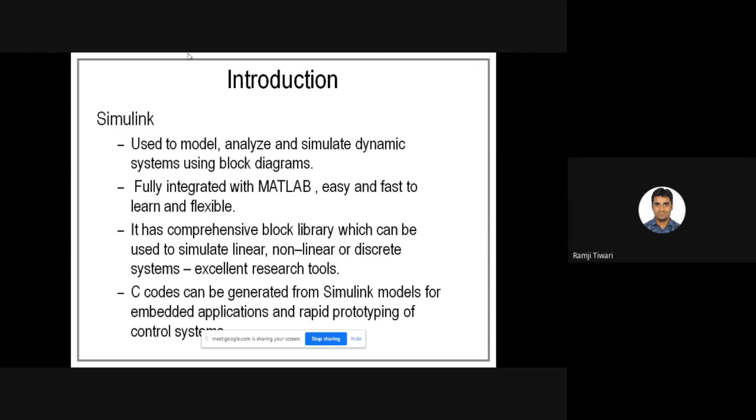You will be having all the toolboxes. You're going to drag that to your Simulink file, connect it, change your parameters, and after that you're going to run and get your results. It's quite simple. So how to start?

So basically, if you want to start your MATLAB, in Windows 7 and earlier versions, you'll be having Start, Programs, All Programs, and then you'll go for MATLAB. If you're using Windows 8 and above, you can see my screen will be having Start here. You click Start, and you'll be having a program here. You can actually drag it to M, and you'll find MATLAB.

If you click this one, you'll be getting something like this. The first page will be something like this. This will be the initial page of your MATLAB. When you open your MATLAB, the first page will be something like this.

We'll be having a command window, you'll be having a workspace. When you are first time on MATLAB, this current folder will be empty. You won't be having anything. It's just a MATLAB folder in your C drive.

Then next, what happens? So this is what I was saying. Once you open MATLAB, I've already opened that, so it's here. You open it, and you'll be having your current folder, your workspace, and your command window.

So the command window is nothing but, if you're going for basic calculations, you're going to assign some values. Let's say I'm going to do some multiplication. I'm going to assign some value for A, and some value for B, any variable, and I'm going to do a multiplication of A into B. So I'll be getting that result.

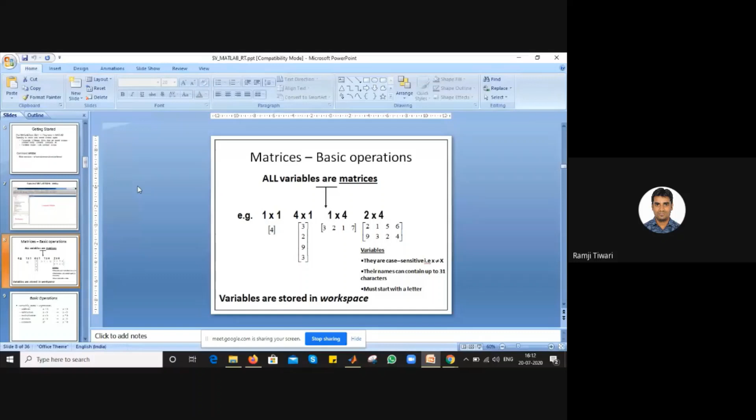So now next, I don't want to go again over the basics of your basic multiplications or divisions. I'm going to tell you much more advanced things, what we're going to do with matrices, the basic matrices, what we see in college in first year or in schools. You'll be having your matrices.

So if you want to give a column vector, you're going to use a code something like this. You'll be using a semicolon between your variables, something like this. I'm going to open the bracket, I'm going to use semicolon for generating a column vector, and if I enter that, you get your column matrix here. Now, what if I want to do a row matrix? I can just give, say D equal to, I can open, I can give space. Use space for that, and I have to enter.

So you get a row matrix. This is how you generate your matrix. So this is just one by one.

Now, what if I want to go for a 3 by 3 matrix? If I go with C, 2, 3, a semicolon - one row is completed. Now second row, 4, 5, 6. Again a third row, semicolon. You have to segregate your rows using semicolons. 7, 8, 9. This is how your 3 by 3 matrix has been generated.

So it's all very, very basic. I will be sharing the PPT with you in the organizer so you can have a clear look at that. In the PPT, I'll have all the basics on how to use matrices and everything - your column vector, your row vectors, and your 3 by 3 matrix.

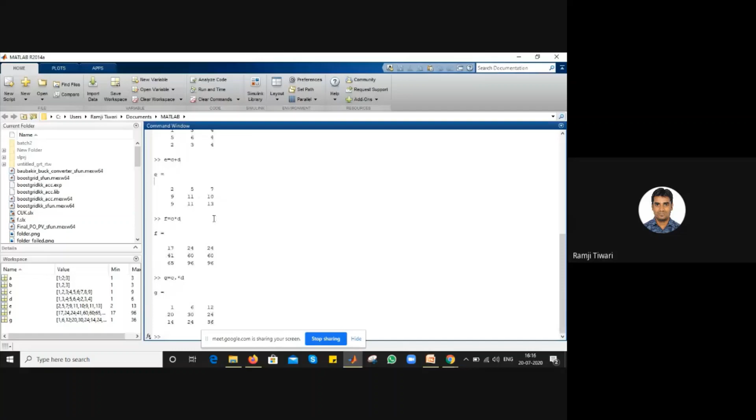So what's the difference here? You can see the answers. If you just go with C into D, you get 17, 24, 24 - it's row into column, your usual way. And when you go for element to element, what happens? You can see C and D here - your 1 into 1 is 1, 2 into 3 is 6, 3 into 4 is 12, something like that. 1, 6, 12. I'll go with the PPT, it will be more clear for you.

What if I want to find a square? Because again, finding a square is very difficult manually. So at that time, you have to use your caret - I'll just show you. Suppose I give some variable name t, which will find the square of C.

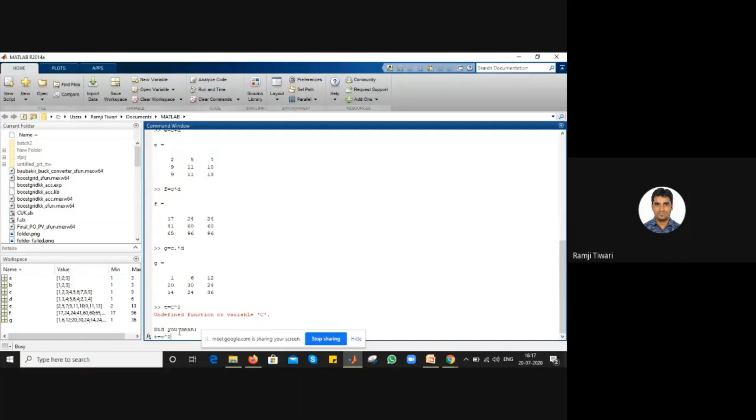One more thing I have to say here - it's very case sensitive actually. If you're using a small c and then you give a capital C, an issue may happen. So you have to always give the same variable, whether small or capital alphabets - you have to give the same variable. It's very case sensitive. So for using your square, you have to use this symbol.

So this is the basic operations we do in the command window. The command window is something like a calculator - your basic operations you're going to do here.

But next comes your M file - this is where the actual work starts. Your actual MATLAB starts from the M file. In the command prompt, you're going to use simple problems, simple operations and everything like that. But when you come to the M file, you're going to use complex problems, or problems which you're going to use again and again. You have written a code and you want to use this code again and again - at that time, you have to go for your M files.

Again, M files are classified into two types - the first one is your script, the second one is your function. Now, something about your script - script is something same like your C programming. You're going to program something, you can get your results. That's it.

Your function, the function files, is actually embedded in your Simulink. You will be having a code that you're going to embed in your Simulink, where your input variables change according to your Simulink variables. Once you embed that in your Simulink block, suppose you have problems where your voltage keeps changing, and based on that change you want a specified output. At that time, you're going to use your function block. So the function block is generally embedded within your Simulink folder.

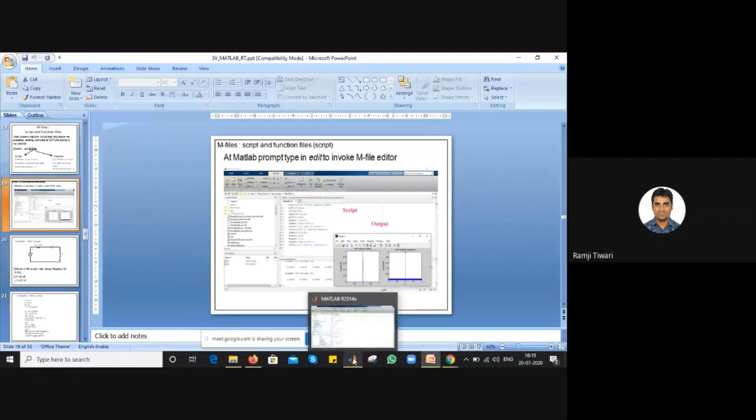So, how to open an M file? First, I'll tell you about it. You just see there'll be a new script option. If you click new script, an editor box will open here, an editor page. This is where you're going to type all your codes, like you would for C or C++. The same thing you're going to type here.

Already I have a small code, an example, that I'll show you. I have a code for a simple RLC circuit to determine the current. I'm going to just copy paste the same thing.

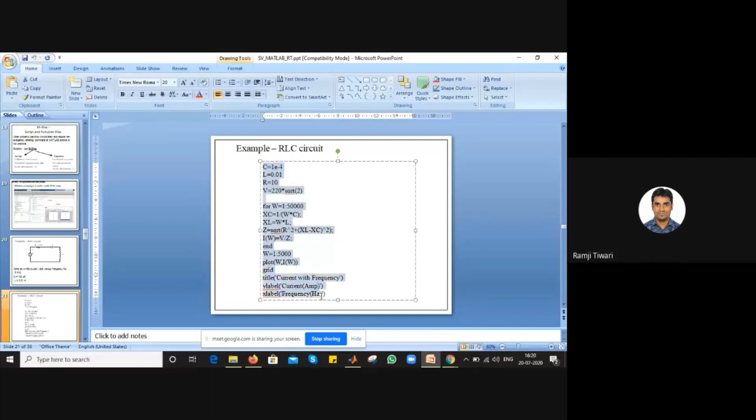So I'll just copy paste the same thing. You can see in your code what happens: you're going to predefine your capacitance value, inductance value, resistance value, the voltage - everything you predefine. And you're going to use W, which is nothing but your angular frequency.

You're giving something like 1 colon 50,000. You're going to give your formulas. What is the XC formula? It's 1 by omega C. What is the XL formula? It's omega L. So you give the same formula here, and you find an impedance value. With that impedance value, you find your current. So this is what you're going to execute in the program to find the current of your RLC circuit.

And once you have typed your code, you're going to save it. To save, again, you can use Control S or File Save As. I've used Control S now. I'll just show you how to save here.

We have something called save here. You can see at the top: new, open, save. So this save, you have to click it. You can save wherever you want. I want somewhere on the desktop, so I'm going to save there. I'm going to save it as sample test.

Once I save that, you can see the sample test name will be changed here in the editor box. I'm going to run this one. While running, it will ask me to change the folder because I am not saving in the MATLAB folder. I want to add this folder to the path, so I have to go for add to path.

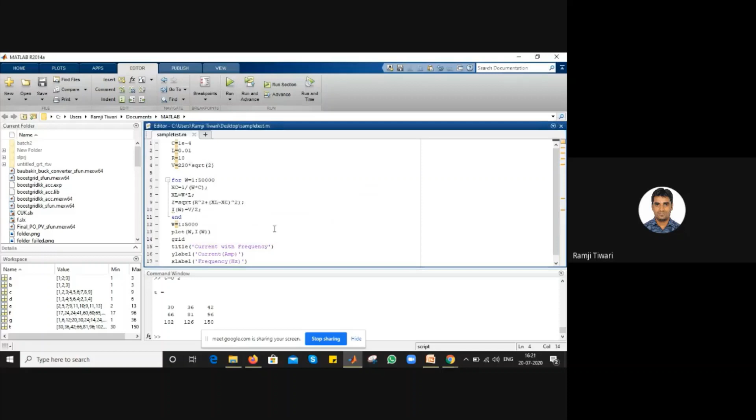If I run, my figure window will open because I've used something called plot here. This plot command is used to plot my figure. You just see plot W with IW. W is nothing but your angular frequency. I'm going to plot my current with respect to the angular frequency.

If I don't give W, what happens? It auto generates a time ratio, a time division - it auto generates, and you won't have a particular value. You'll have very small or irregular values, and an irregular figure. So always, whenever you're plotting, generally plot with respect to time or frequency, something like that.

So this is what's here. I've used a plot, and I'm just getting my figure like this. You can see already I've given my title - what's my title? Current with frequency. I'm getting a current with frequency here. My Y label is current, and my X label is frequency. So everything I'm just giving here automatically generates the output.

In detail about your coding, the basics of your coding will be taught in tomorrow's class, in tomorrow's workshop.

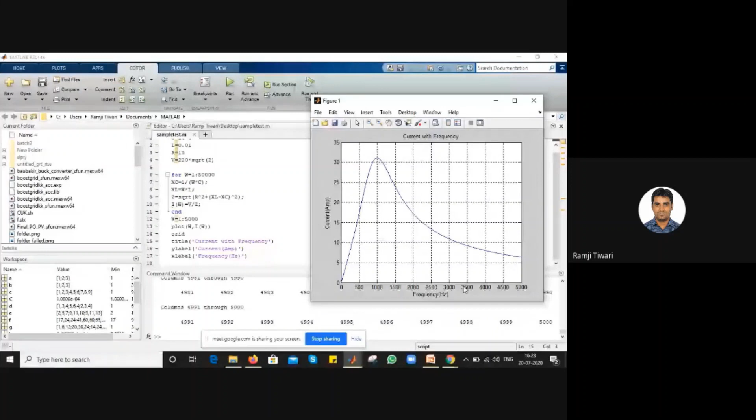So I won't be much focusing on the basics of coding right now. You just need to know the basic things. First, you're going to assign a value - simply give a variable name, say my name is Ramji, Ramji equal to some value you're giving, okay.

Second, you're going to perform your task. For performing the task, you're going to use certain formulas. So here I'm going to find your XC and XL values. I know the formula - my XC is nothing but 1 by omega C, and my XL is equal to omega L. So I'm going to specify that. I know my impedance value is the square root of R square plus XL minus XC the whole square.

So I specified that. Now I'm going to say my current is nothing but V by impedance - V by R, V by Z - and then I'm going to plot that particular file. But if I want to see what my impedance value is, I can just simply click here, the same thing you're giving there, IW.

And you see what are the columns and vectors, everything will be here. And each column, everything will be specified here. And if you want to see the data, if you want to take this data, you can get it from your workspace. Here you can get all the data - your XC values, your XL values, your Z values, everything you can get from your workspace. If you want to get it in table form or something like that, I'll just show an example.

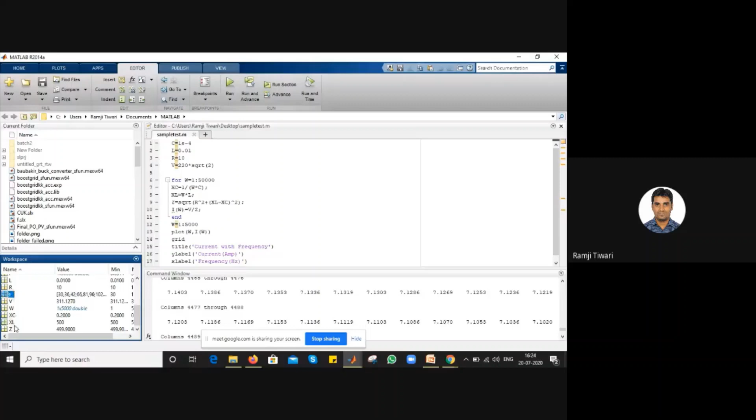Suppose I want for T. I double click this one. So I get my T value. I can save this in Excel or Word, wherever I want. I can save it, I can use it for my future references. So that's very easy, something here.

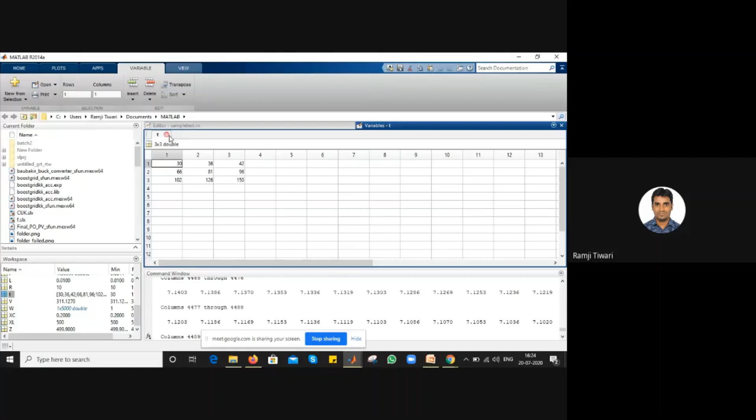And if you do the same thing in the command window, what happens? Suppose I'm just doing the same thing in the command window - this I can save, I can use whenever I want. But if I do this in the command window and press enter, it executes and I get an output. But if I just do CLC, what happens? It's completely gone, my code has been gone. Again, if I want to do the same code, I have to type everything again.

So always when you're doing a complex problem, not a single line program, kindly do it in your M file. How to open the M file? You open home, you have scripts. I've said to you again, I'm just reminding you - go to home, go to new script. If you click your new script, your tab will be open here. In this tab you can just type your codes. So this is how your M file works.

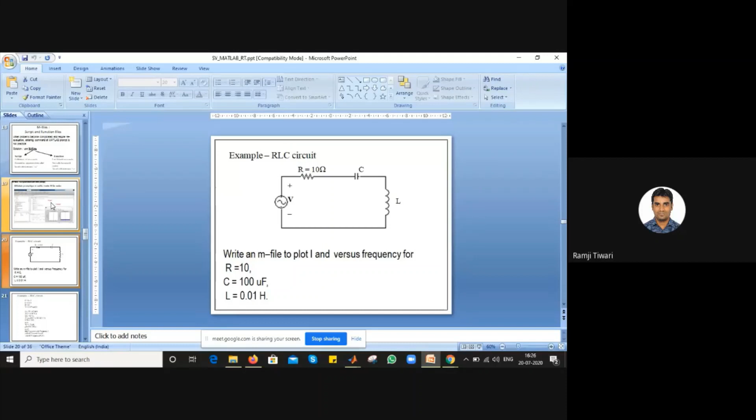So this, I've given an example of a basic RLC circuit. I want to find a plot of my current versus my frequency. So this is the code I've written for that. I've already defined my R, C, and L values. So RC value I'm going to define here. V is some voltage for your RMS circuit, which is nothing but 220 root 2. So that's what I've used here. And then I'm going to give the formulas for that, and I'm going to generate my results. So this is the output which I'm getting for your RLC circuit.

Now your function block - next comes the function block. What I said about a function block - it is something which is embedded in your Simulink file, which can be used for different input and different output variables. So here you want to specify that. Like for example, here your RLC value you have specified, but in case you're going to use it for some other circuit and you don't have your specific RLC value, you're going to use it for different systems, different times.

So again, you should not go to the code and change it there regularly. You can just directly implement the same function block in your Simulink file where you're getting your RLC values, and you can embed the same thing there. So you're going to give your input, you'll be having your commands here in the function block, and then you'll be giving your output. So when you start here, I'm not starting with anything - I'm just declaring my variables.

But what if I start from here in my function blocks? So my function block should start with the word called function. My output, which is equal to the function name and the inputs I'm going to give. In your earlier case, what was my output here? My output was your I value, and my input was RLC and 220 voltage. If you want, you can use a simple voltage block, but okay, we'll see - RLC and V, these are my inputs. So my function will be like: function IW, which is equal to your function name, any name which you want to give.

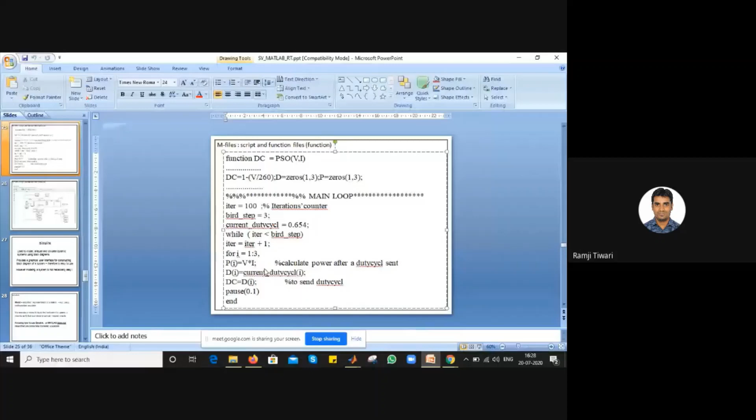Now I have designed a function for one certain task. My output for the task is something called DC, and my input for that is V and I. My function name is PSO. So this I have performed for one small task, and I've written all my code here. What is my DC? What is the formula for DC? How many iterations I'm going to use? What is my P? How to iterate P? How to iterate my V? Everything I've given here, you can see how to embed this one.

I have a Simulink file. My V and I are completely variables, so I'm giving that particular V and I to my MATLAB function block. My MATLAB function block is this one. My function name is PSO, my output name is DC. This is where your MATLAB function thing will be useful.

About your basics of circuits, that will be explained on your last day by one more guest who is going to teach you about power electronics. We'll be teaching much about when you use a closed loop, because generally this function block is used for your closed loop control in a real-time system. When you want to do basic PV, when you want to generate a duty cycle, or when you want to change the transfer function in control systems in real time while your simulation is running, at that time you're going to use the function blocks.

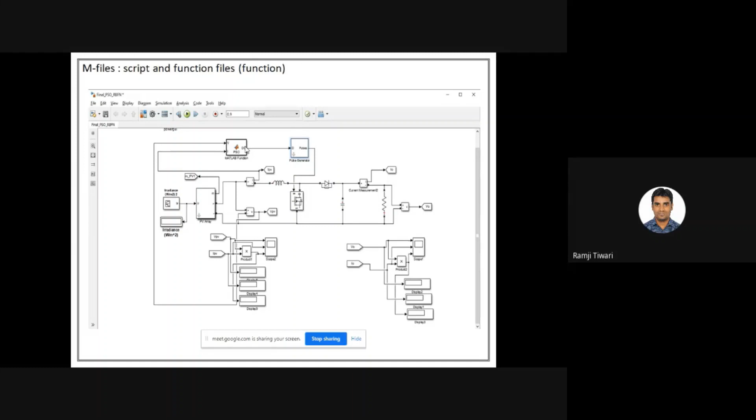Now, something about your third step is your Simulink. I've taught you what is an M file, I taught you what is a function block. Now, what is your Simulink? As I said earlier, Simulink is something to simulate or analyze a circuit diagram. You had a circuit diagram, you did that circuit diagram in the RLC time using coding. But what if we can do it some other way? So I can use Simulink for that.

This is generally used for analyzing your converters, your electrical circuits. For that, like your mesh nodal, your KVL, KCL values, your theorems - Thevenin's, Norton's, superposition theorem - to verify that particular thing, you're going to use your Simulink block. So it's very easy.

You can even use mathematical equations here. Like we have used that for XL and XC, we have used it in terms of code. Here you can use it again in simulation. You can give a mathematical equation in that particular simulation file, and you can run the same thing.

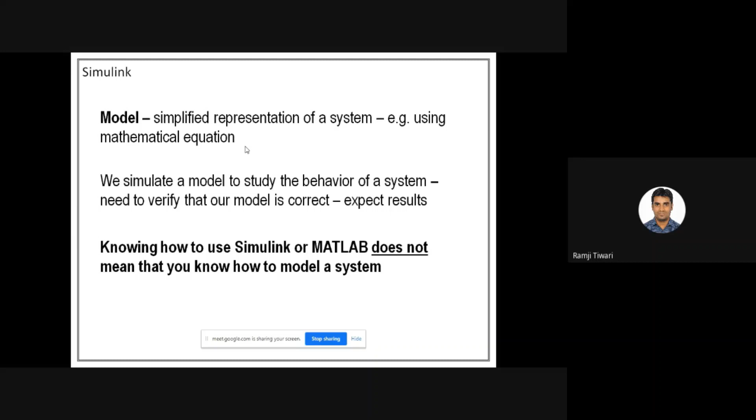The foremost thing which you want to know about Simulink is your simulation library. That's an important thing which you have to know in all of this, because in the simulation library you're going to use all toolboxes. So you're going to use the simulation library for that.

Now I'll just explain how to open a Simulink file. Like earlier, for using your M file, you're going to use home, new, script. To open your Simulink, you have to go for open, new. In this new, you'll be having something called Simulink model. If you just click this one, a page will open. I'll just show you what that is.

So you can perform some circuits like this.

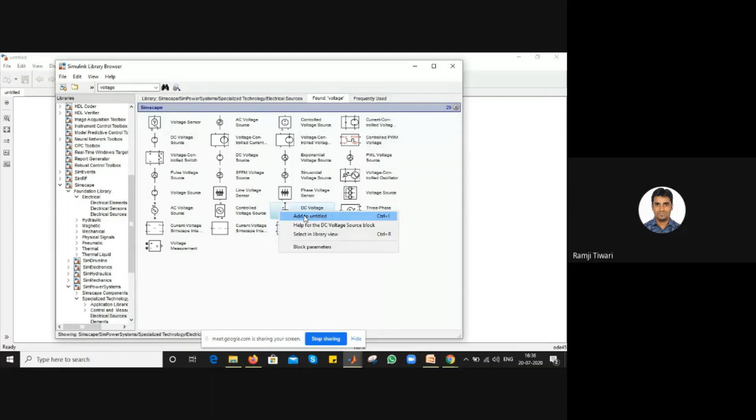As I said, the initial time will take some time because you have to refresh all the thumbnails, and there are a number of toolboxes. So these are whatever names of voltage sources you'll get here. You have two types, but generally we'll be using SimPowerSystems. You can just use a normal DC voltage source here. I'm going to design a DC circuit, so I'll be using a DC voltage source. I can just right click and add to Untitled. Untitled is just my simulation file name.

You can see when I've added it here, I got my DC voltage source here. Okay, now next, what I want is resistance. I want some resistance or something like that.

So for that, the term I'm going to use here is RLC. RLC is nothing but your resistance, inductor, and capacitance in the same block. You can use it as resistance, inductance, or capacitance. That is called a series RLC branch. When we use this branch, you also have something called load. You can use that load, but generally load is only applicable when you're using high systems and only for load purpose. But here, not only for load purpose, you're going to use it for multi-purpose, so you're going to use a branch for that. So I have my RLC branch.

If I double click this one, I can use it as RLC or combinations of resistance, inductance, capacitance. Like this I can use it. So initially I want resistance, I can use resistance. I can just give values, suppose I want to use 10 ohms, so I'm going to give it 10 ohms.

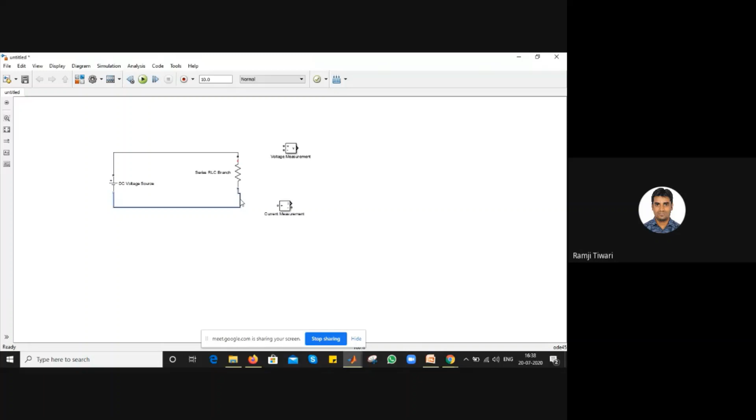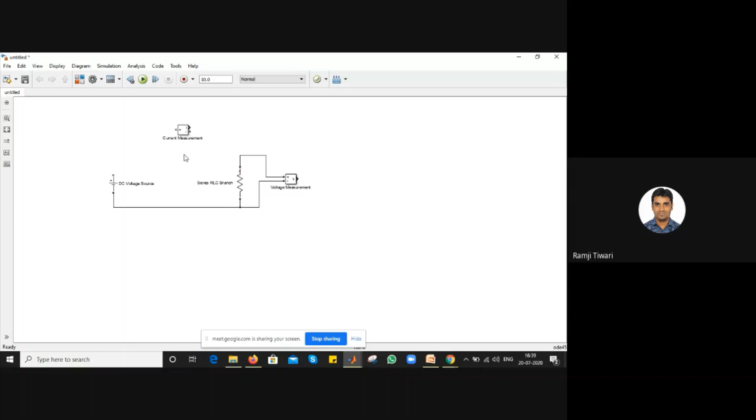So generally you're going to connect your voltage measurement across your load, and your current measurement should be in series - you connect your ammeter in series. So I'm going to connect it in series. Now I got my voltage measurement and current measurement.

Now how to see my output? There are two ways you can see your output. One, if you want it in terms of numbers. The other, if you want it in a graphical way, something like a graph. So for seeing that, we have something called a display. We use a display block.

When you go for the higher level, when you're doing some hi-fi project, something like that, then you go for your DSP blocks, your discrete blocks, and everything like that.

Then I'm going to use display here, config here. This is to check my output in terms of values. Okay, the same thing, I can just simply right-click, control, and drag, so that I can get it.

I don't want to go back to library and again add to Untitled. So you can just simply hit control, right-click, and simply you can drag. If you get, you can get a duplicate block.

Suppose if I want to see my output in a graphical way, I can go with something called scope.

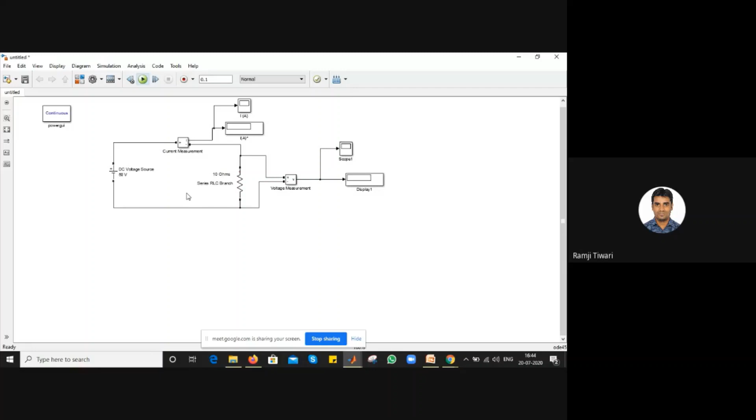The simulation started running. You can see here, first initially it compiles, it just finds out for some errors in that. So after compiling, it gives you the results.

So my compiling is almost done, and I got my output.

So I'm getting 50 volt because I'm getting 50 volt as this thing, and I'm getting my current as 5. In a DC circuit, your I is something about V by R, so it's like 50 by 10, you're getting as 5. So this is how your basic simulation is done.

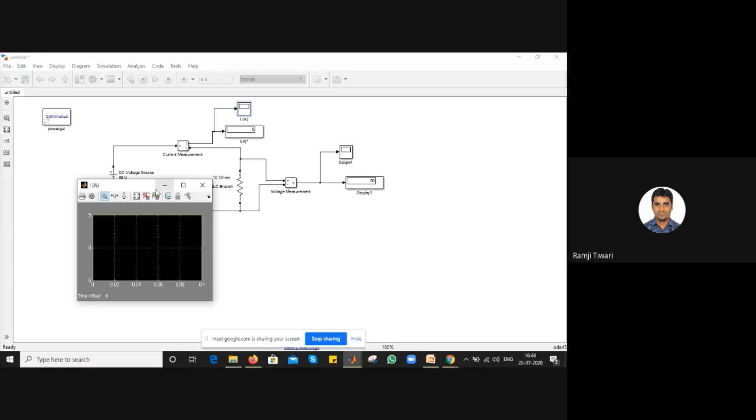Okay, what if I'm going to change it? And I'll just show you the scope thing. Same thing, what you have gotten in value-wise, you're going to get it here in your graphical way - graph, we have an X label, Y label, and your output 5 amp.

Okay, and like generally when you click, you have to use auto scale here to get the exact thing, because if you see before, it was like from 0 to 5 - I was not able to see my 5 because it was in line with your axis.

That's why I've done auto scale. The auto scale itself gives the perfect values. So it's very easy for us to see. I can see I don't have any settling time because I'm just getting my direct output. So I've used very less time, from 0 to 0.1 seconds.

What if I use 100 seconds? What happens when I use 100 seconds? It doesn't matter much, my simulation time will increase, that's it. I'll be getting the same output.

See, I'm not able to view my output. I have to do auto scale here so that I can get 50 volts, from 0 to 100, to show my output. Only my time axis will change, from 0 to 100 instead of 0 to 0.1. That's it. When you're using other very complex systems where you have more settling time, at that time you

have to take care of your simulation time. When you're using a basic normal circuit, it's advisable to keep it at 0.5 or 1 second. That's more than sufficient, because otherwise your simulation time will increase. So this is about a basic circuit.

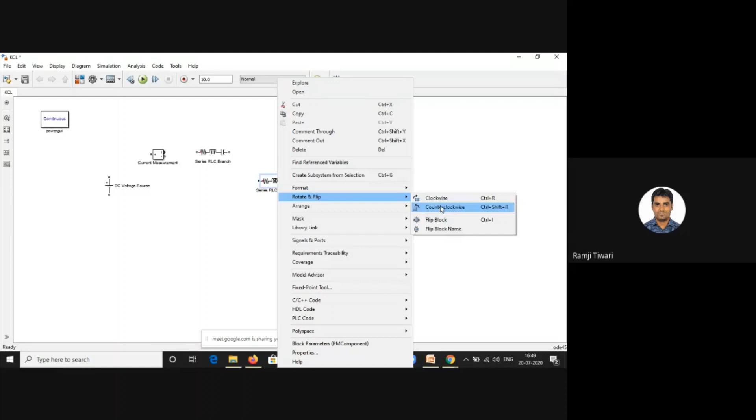Now we'll just perform a small KCL - so I have one input source here. Power here, again right click, control, simply drag. So you can see here it is in horizontal way. If you want it in vertical way, you can simply rotate this one. For rotating, either you can use the right click rotate option, or the simple thing is Control R. Or you can simply go to control and you can see you have a rotate option here, for anti-clockwise or clockwise. Either you can use this one, or simply put Control R. I'm using Control R right now. I've done this one.

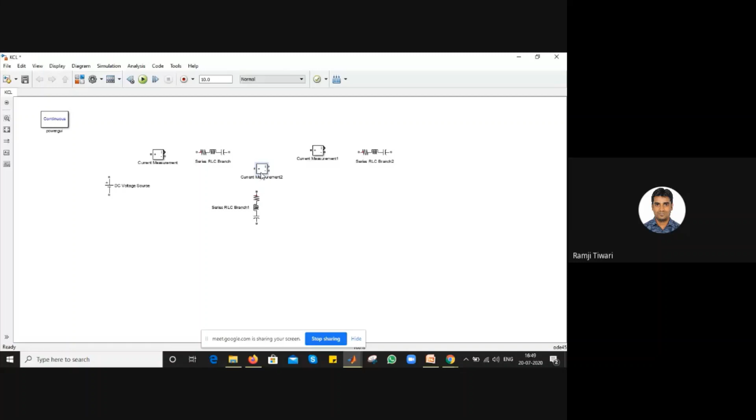So I need one more resistance, I will just keep it here. I'm going to keep the current block here, my current across each. So I can simply click and drag, the connection is there - it's very easy, connection is very easy. Simply click here, you get this positive symbol, click, right click that, drag it to your component and just leave. Okay, so you can just connect the entire block like this.

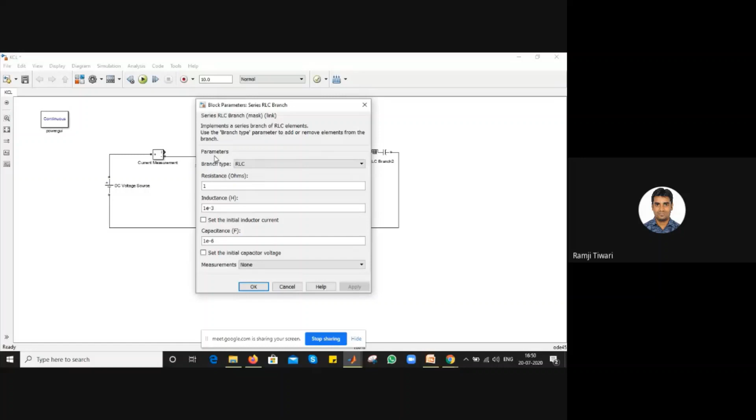Change it to resistance, I'll do some resistance like 10 ohms. Some 20 ohms. And this one, some 15 ohms. It is 100 volt itself, it will be 100 volt itself. I can just change it to 60 volt, whenever you can change.

To view my outputs, I need two blocks, either it's scope or display. Since it's just a value, I'm not going to use any graph way, I can just simply use my display block here. I'm going to add it here.

Okay, now I'm going to run this one. So you can see, the thing which I've done here is I've just interchanged my current measurement block here. You have to rotate this anti-clockwise, but I've done it clockwise, which means my current is flowing in the opposite direction, so it's showing negative. If we add both, let's assume this has to be positive. I'll just change this block.

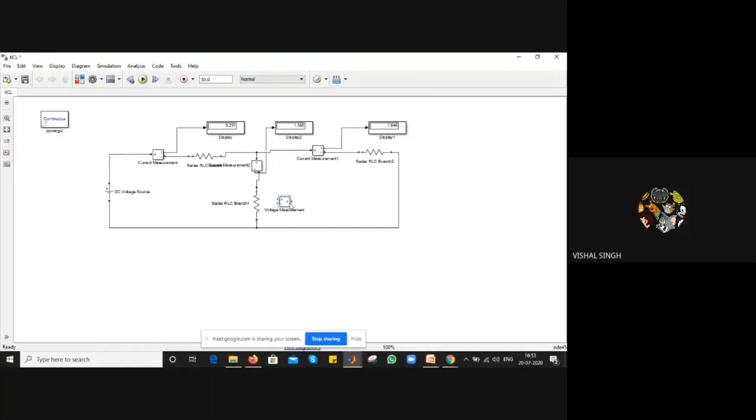So I want 3 voltage measurement blocks, but use the same thing. You can use the same circuit diagram, or if you want some other circuit diagram to perform, you can use that. You just have to connect your voltage measurement across your components.

Okay, just use the display for that.

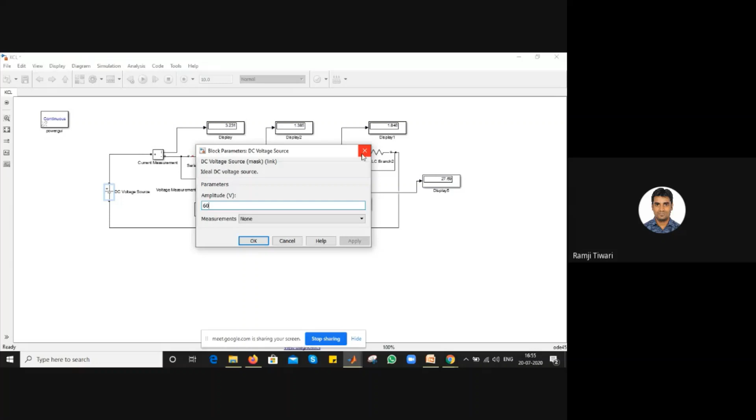If you see, my input is 60, and if you add the 2 voltages, this one and this one, you'll be having 60, because this is being divided by your resistance and resistance. Either you can remove this one, or I can just keep it.

This is usually used when you apply the voltage divider rule and similar concepts. During that time you can use this kind of circuit. If you want to see Kirchhoff's voltage law, algebraic sum of voltage around any loop is 0. For that, let's use any node, and during that time, what happens? I have 32.31 and 27.69. If you add both, you'll be getting your 60 voltage output.

Now, if you see, the system is completely congested, it's overlapped here and everything like that. What if I don't want to use these measurement blocks? I just want everything in a single graph or single value, without this much clumsiness. For that, you can use something called multimeters. I'll show you about that.

I'll go for a new model. Again, I'll use the same components we were using. I don't want to use any measurement blocks, but still I want to see my output. For that, use a DC voltage source. I'll use my series RLC branch. That's it, and your powergui.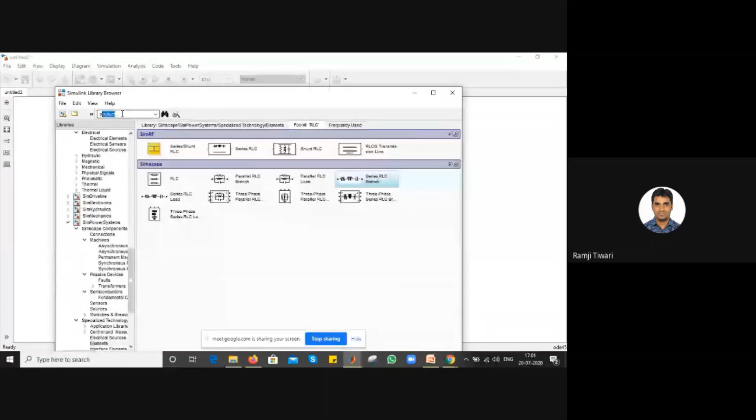Third thing we have to do, as I said, your power GUI. Your power GUI is nothing but heart for your simulation file. So I'll just put power GUI, enter. We're having a power GUI - only one block will be there. Simply click add to Untitled. We have this thing, it's done.

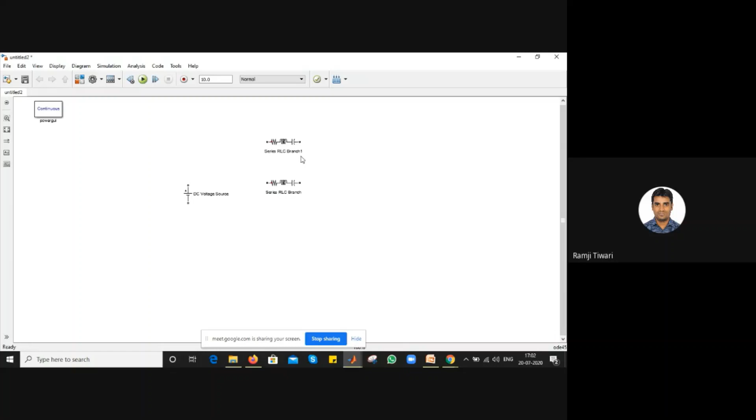If I want to get one more component, I don't want to go to the library again, and I don't want to search again. Simply control, right click, and drag - so multiple times you want, you can use the same component. This time I'm showing how to use a multimeter. Instead of using voltage measurement, instead of using the scope or multiple measurement tools, I'm going to use multimeters this time.

Simply, if I want resistance, I'll use this resistance. I'll give some values, whatever I need, say 20 ohms. For this measurement, now this measurement box is to be used. When you click this measurement box, you'll have three options: branch voltage, branch current.

If you want branch voltage and current to be measured - if you want only voltage measured, like you've seen only in KCL you'll use only current measurement, whereas in KVL case you'll use only voltage measurement. So based on that, you can choose. No, I want to measure both voltage and current, so you can use branch voltage and branch current. Apply.

Now I need one more circuit. I can simply name this as my resistance 1.

Control R to rotate, or right click, rotate - flip will be there too. You can rotate clockwise and anti-clockwise, either way. Control R is the shortcut. Again, double click this one.

You can use only resistance, and you can change these parameters to whatever you want. I'm going to use some 20, or I can use 40. Again for measurements, I want both voltage and current, or I want just voltage - you can choose, but I want only voltage. I choose only branch voltage. Apply. So I have one more resistance, and I'll do the same thing there.

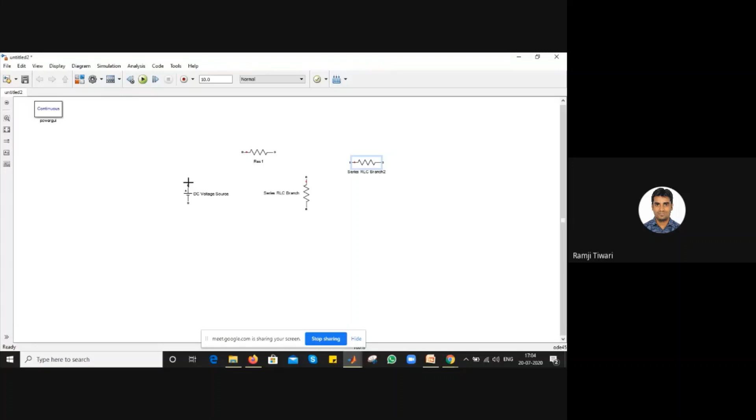Resistance, some 33 ohms, and I'm going to use only the current for this one. I'll put current, apply. So on this, connect this box.

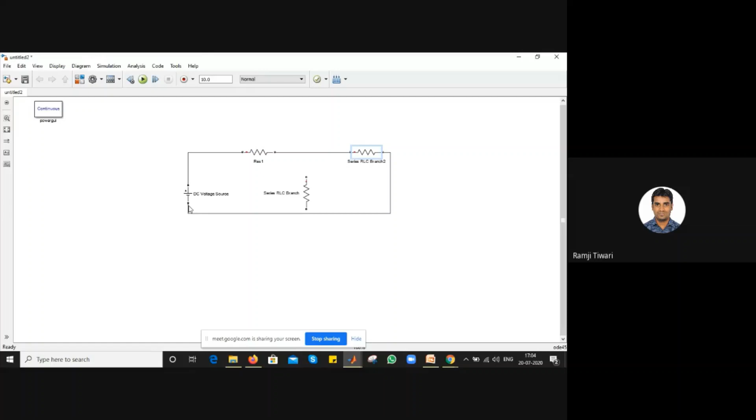So now this one is, I'm going to use something called multimeters. Instead of using multiple voltage and current measurement blocks for each and everything, one block is enough, because I'm going to use measurements in each and every component. Let's put multimeter here, enter. Having only one block, add.

So we're having multimeter here. Now just double click your multimeter. It has given you measurements for each and every component. Refresh that and you can just see.

So for resistance 3, we have taken your voltage. For resistance 1, we have taken voltage, as well as your current. For resistance 2, only we have taken current. So complete, this will be here.

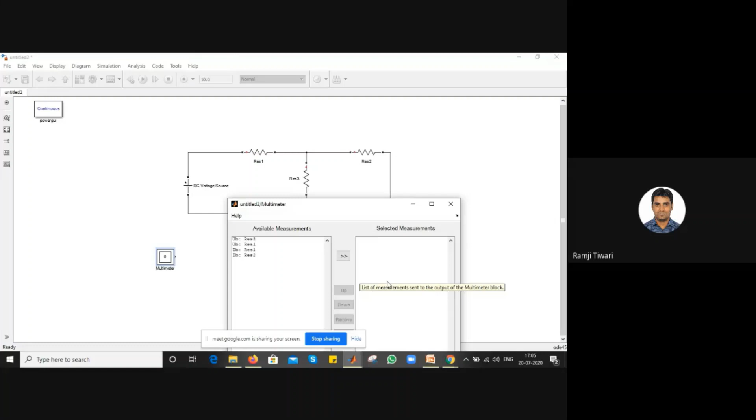So what you have to do, suppose I want only resistance 1 voltage and current, and resistance 3 voltage here, I will just click this arrow here. I click, so this will be selected here for measurements. I don't want to see my resistance 2 current now, I don't bother about it. So I can just click only what else I need, and it will be used for the selected measurement will come here.

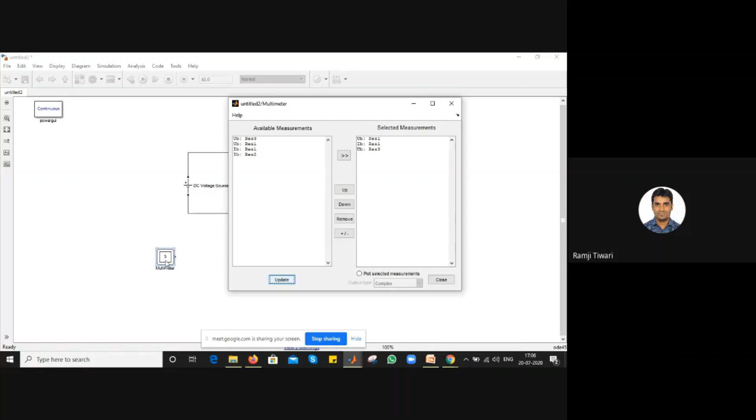Now what happens, we have 3 measurements in this plot. Now I want to make these 3 resistance values to be individual things. For that you have to use something called Demux. You have here something like Mux and Demux. Mux is many to 1, Demux is like 1 to many. So you have something called Demux here.

Demux and enter. Simply add to untitled, use it. We just use something Demux here. Correct, but you can see only 2 will be the outputs initially, that's a predefined one. Okay, we have to change it. Now we have 3 outputs, so you're going to change the number of outputs to 3. I'm going to say apply.

Okay, now we got 3 outputs, you can see. Now I want to see this one. Either I can use scope or I can use display, which I've shown you. So I'm going to use scope. If you want to see all 3 things in a single scope, even that you can do, I will click this one.

Go to the scope, there will be something called set parameters. Click the parameters. Number of axes will be there. Now we have 3, you can change this to 3. Click apply, and you can see your single scope window has been changed to 3 different output windows. You can press close. I can just bring this out. Now you can see your scope is having 3 different input variables, so you can just simply connect.

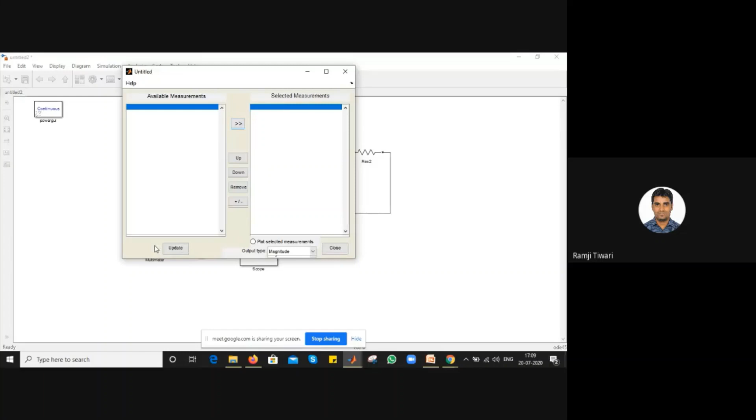Suppose now I want to see my resistance 2 current also. Even that I have to add here, so I have to click here again, and use this add button. I'm going to add it here in the 4th position. But I want to make this my 3rd output. I can move up, I can see it's like resistance 1 voltage current, resistance 2 current, and resistance 3 voltage there right now. I can just simply update and close.

Instead of 3, now 4 will be there. Okay, now double click this one. Again we have to change this, because earlier we were using 3 inputs, so number of outputs was 3. Now we have 4, we have to use number of outputs as 4. Apply. Okay, so automatically your one more output variable is increased here.

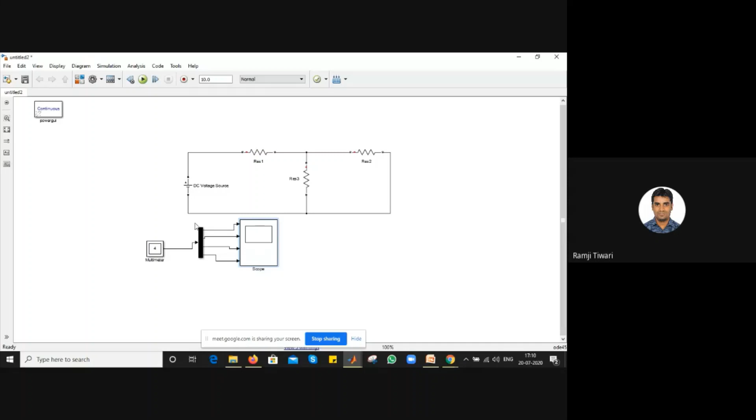Even in the scope, you can just double click, go to your parameters, and simply click axes as 4, apply. And just see, 4 parameters have been generated now, and current is the 4th parameter here, and you run.

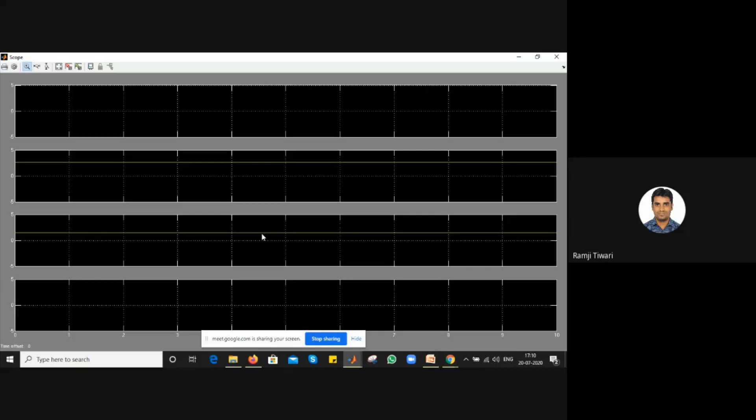Auto scale. So whenever you run once, you just do auto scale. That's important, very much important. Then you get perfect thing. I can see you having your 4 output this thing. So this is the way how you see your output, basics of your Simulink and everything.

Okay, so you have known how to use the multimeters, where scope is used, why display is used. To remove that particular complexity in the circuits, you can use multimeters for that. You can use a measurement block which is present in a component thing. So everything is like visible to you.

Now next, I'll tell you something about your theorems. I want to verify some theorems. Theorems are again a bit complex, and you'll be using multiple things. Let's say when finding your RTH, in calculations you'll be having your R1 into R2 by R1 plus R2. But here you can't find that, so you'll be having a formula for finding your RTH. Your R is nothing but your V by I. So you'll use some mathematical function blocks there. So how to use that? What is the term's name and everything? I'll just tell you in the coming slides.

So KVL we have seen. We have seen multimeter, how to use a multimeter here. Next is your superposition theorem.

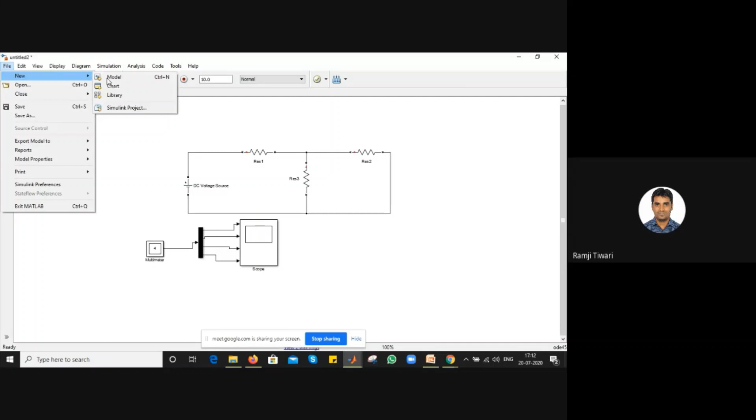So superposition theorem, again, if you want to verify, we'll just verify that also now. Again, we'll go for file, new, model. So what is superposition theorem?

The current across any component. We're going to use two sources here, right? In superposition theorem, we'll be having two sources. So we're going to use two sources and keep it like this.

Next, we're going to use your resistance. If you already have your old Simulink file open, you can just simply copy paste also. That will be very easy for you. Control C and Control V, same what we use for a word. Control C here, and just Control V there, instead of going library again and again. Control V here, you can simply copy paste. Again, I can copy, say, just paste multiple times. Whatever how many times I need, I can just paste that using Control V.

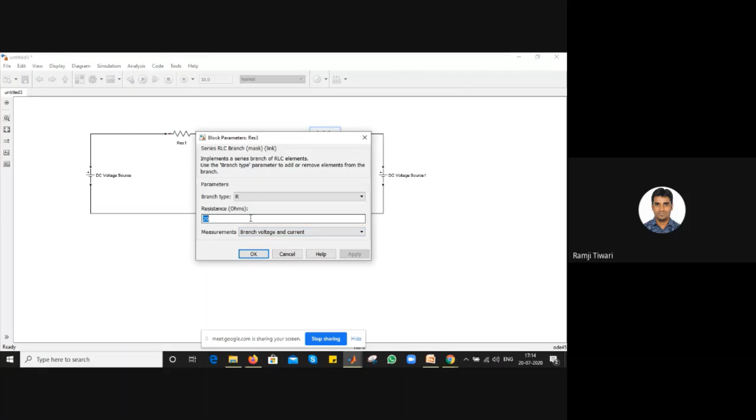So I'll just keep that as 20. I'll keep this as some like 40. This as 60. In one parameter let it be 100, another parameter let it be some value.

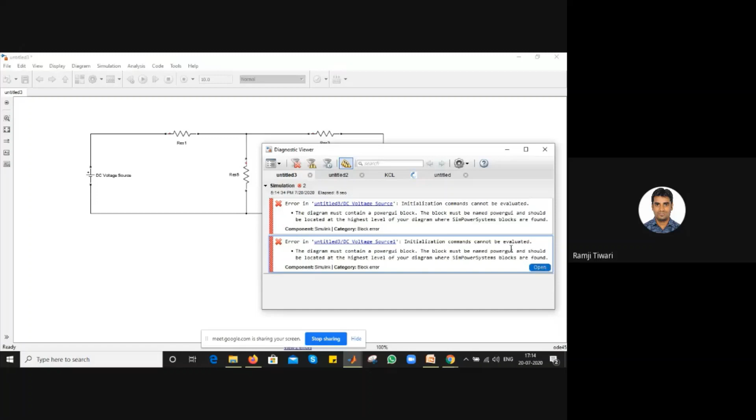One more thing, which I said, power GUI. I'll just show you what happens when you don't use power GUI. A diagram error is shown. It's showing like something your command is not being initialized because I've not used my power GUI. For that reason, when you get like something like this, then you remember that you are going to use power GUI. Generally, what happens when we perform certain circuits, we won't remember to add that. So whenever you get something like this, don't scratch your head for searching some faults in your circuits. It's just because you have not used your power GUI. So whenever you do, first you add power GUI, then you perform your circuits in Simulink. Power GUI, then just do like that.

Now I want multimeter. Next I need display. Just go with the display.

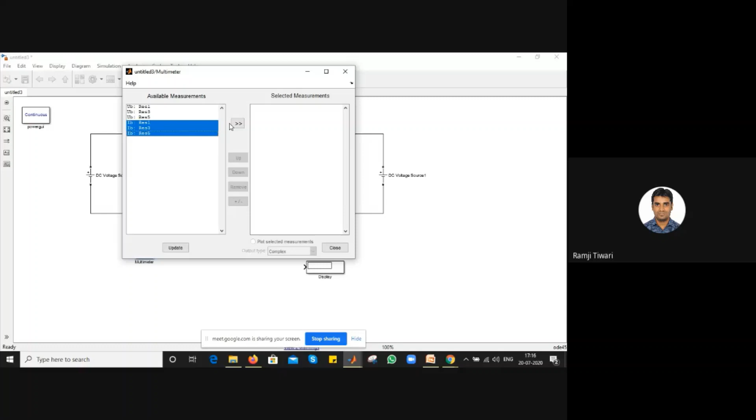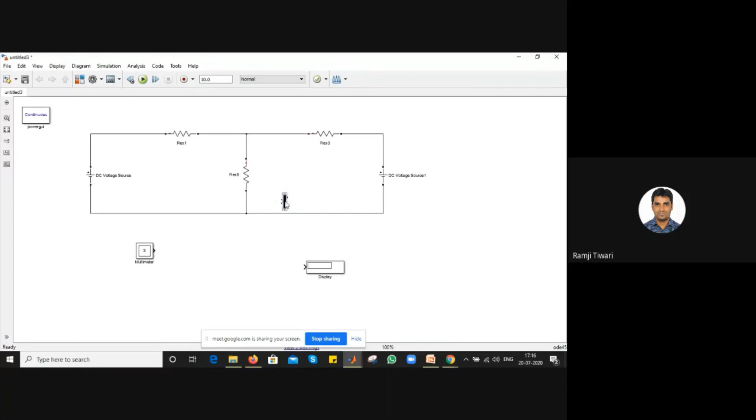So automatically already we have given your both voltage and current measurement for your each resistance, but we are going to just see the current. So we just copy our 3 currents here, just keep it here, update. Let's just go at Demux. We have 3 outputs, so I'll just keep this 3. So minimize this one.

Display we can't go with the multiple thing, so we have to use individual display for that. For scope we can have in single file and not in display.

So this is the current which you're getting. So if you want to check for a superposition theorem across my resistance R5, what you have to do? First, you have to short circuit your 1 voltage source. Then you have to short circuit your other voltage source. If you compare, add the both currents, you will get your total value. So R5 is...

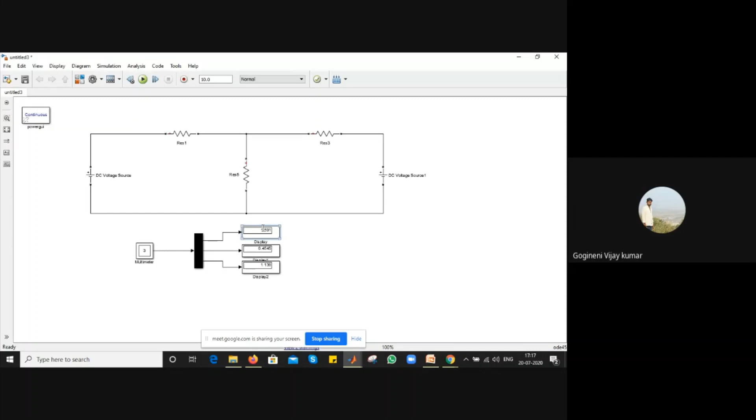I have a doubt for you. Yeah, tell me. Someone was having some doubt. Can text me once they have doubt.

There are certain queries. So once I complete the superposition theorem, I'll go with your queries. I'll just complete my superposition theorem first.

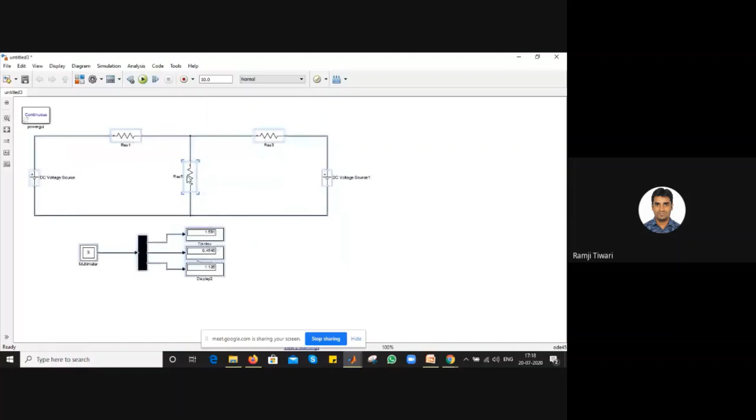We can perform everything in a single window itself, no need to open again and again. I've just selected all here. I'll simply copy paste using Control C and Control V.

Now I'll short circuit one of my sources. I'll short circuit this one, and simply drag it. Once you do this, make sure to remember to update your multimeter, since we're using multimeter, we have to update that.

Now you'll be having more. So why make it so complex? We'll simply go with the display and current measurement instead, so that will be easy for you. But if you're using multimeter, you have to keep updating your multimeters. Earlier we were having only 3 resistors, now we have 6 resistors, so you'll be having 6 voltages and 6 currents.

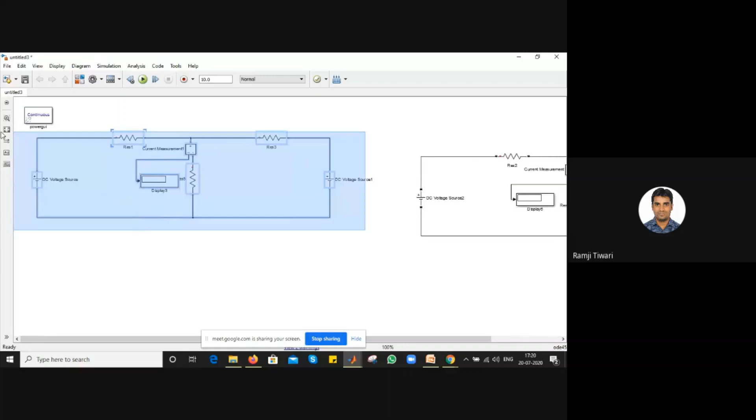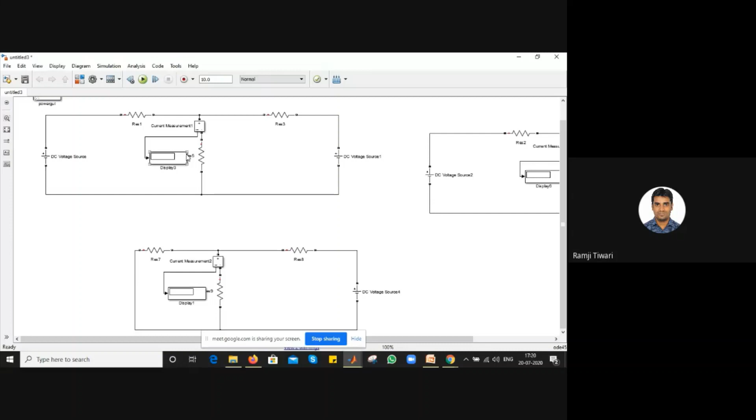So I can see the superposition theorem. First, we have initially 2 voltage sources. We want to measure current across resistance R5, across this resistance. Next, what you do is short circuit one of your sources, and in a second circuit, short circuit the other source. If we just run it, let's see what happens.

You can see your total current here is 1.136 across your resistance R5, this middle resistance. Due to the source 1, we have the current as 0.90. Due to the voltage source 2, you have 0.22. And if you add 0.90 and 0.22, you will get your 1.136.

For that, if you don't want to do calculation, if you don't have a calculator right in hand, you can simply use an add block or sum block. You can use anything, add or sum. We have add here right now, so I'm just...

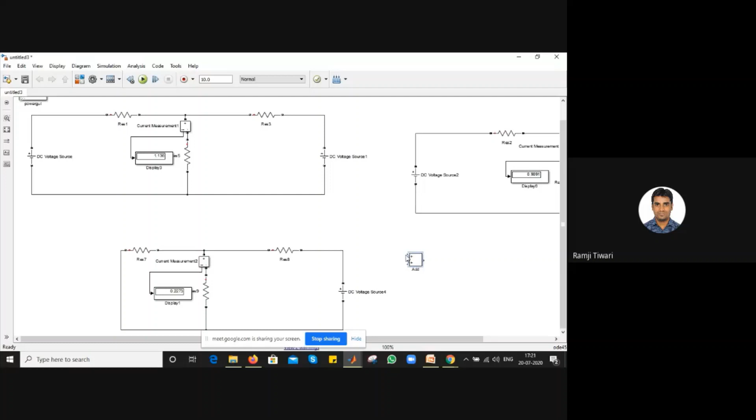Simply I'll just add this both. Use one more display block here. Next one, so you can see 1.136. So like this, you can say your superposition theorem has been verified.

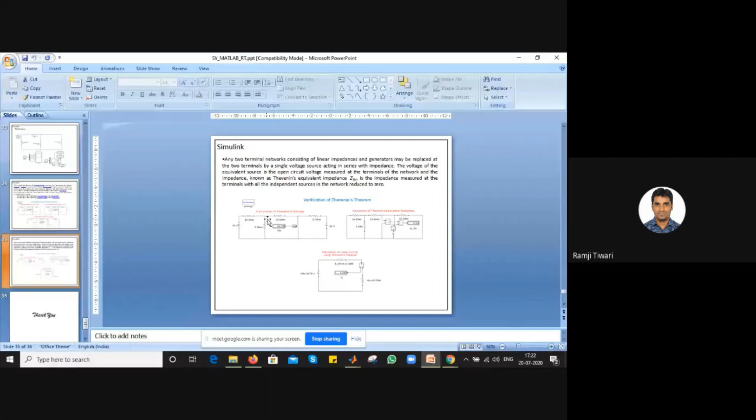Similarly, you can do for your Thevenin theorem also. Generally in Thevenin theorem, what you do, you open circuit your load resistance, then you find your VTH, your RTH, and everything like that. So here, what we do with your R1, R2, instead of doing panel calculations, at the place of your load resistance, you're going to place a small value DC voltage source to get some current. I'll show you that also.

Another way to open a new one is Control N. If you use Control N, a new Simulink page will open. Again, we'll go with a small DC voltage source, then series RLC branch, then powergui.

I'll go with a simple circuit rather than going for a complex one.

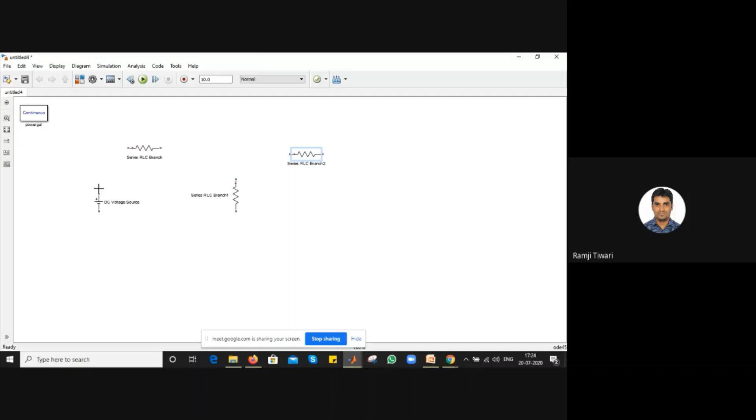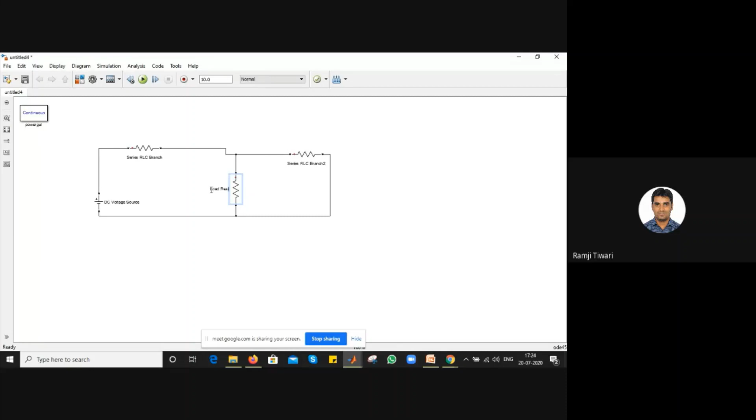So now let's consider this as our load resistance. Now we have to find our Thevenin's. We have to simplify this into just one single source, single resistance thing. For that, what you have to do is first find your RTH. What we do is eliminate your source, short circuit your source, and then find your RTH. This is what we do. So going for bank calculation, we remove this completely, as we short circuit this thing.

So instead of this, we're going to add a small source. What is this? We'll add a small source of 1 volt, because if you don't give any source, what happens here in Matlab is your system will not give any output. For that, you have to add a small source of 1 volt.

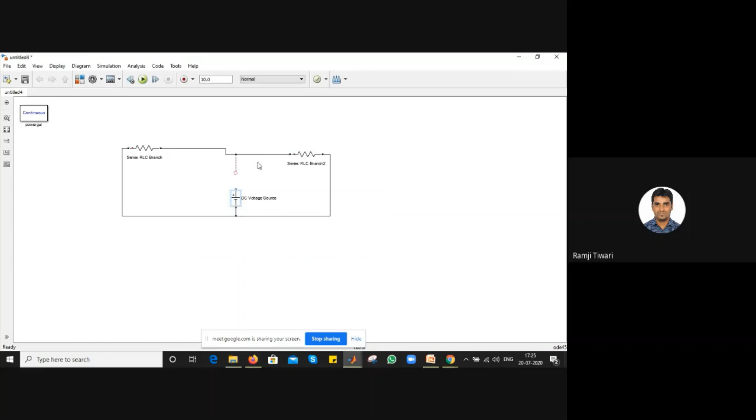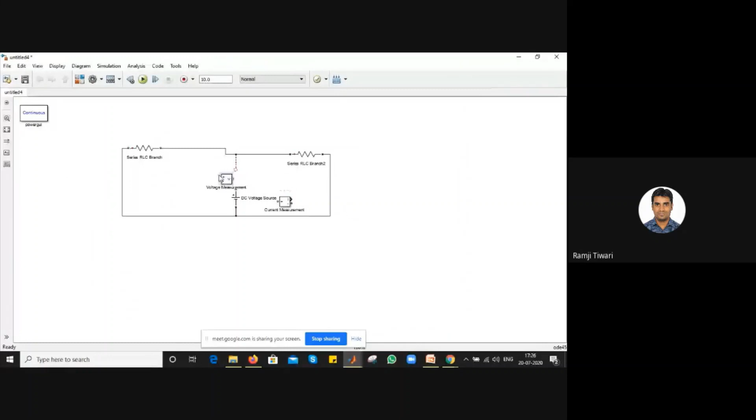Now you're going to find your current across this point. This is the current measurement you're going to use. What do you use it for? So voltage across your load resistance, your current in series circuit, your resistance. Next, you're going to use your display, one for your current, other one for your voltage.

Now, for your DC circuit, your R is something about V by I. So you have your V, you have your I. So to find your R, you have to use something called the divide mathematical function block. So this divide you can use, simply V with current through the product sign, divided by I.

So this block is nothing but your RTH block. The only thing you're going to do is add a 1 volt DC voltage source. Because if you don't add it, what happens? No voltage source means no source in the simulation, so it doesn't run. To make your simulation run, you're going to use this one.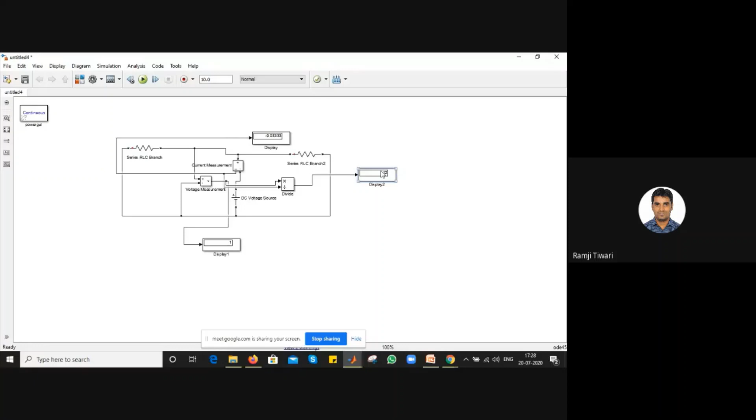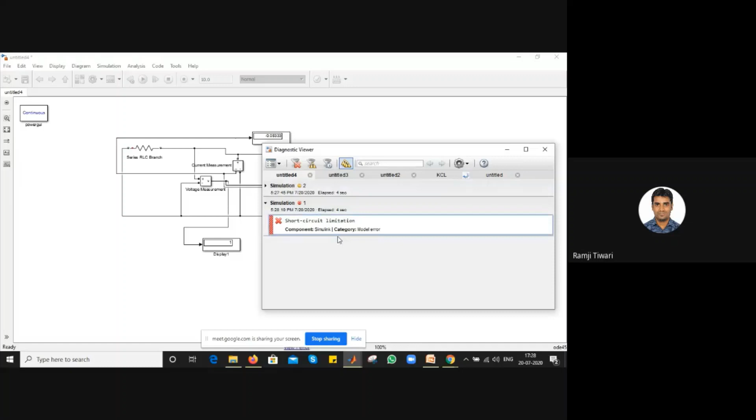If I don't use a DC voltage source, what happens? You won't get any output. So to remove this issue, rather than your normal circuit diagram, you have to add this one voltage source. See, now it's a short circuit limitation because you're not using any kind of sources here. You don't have any connection between your series RLC circuit and parallel RLC. That's why it's showing an error here. So for that reason, you have to use a DC voltage source.

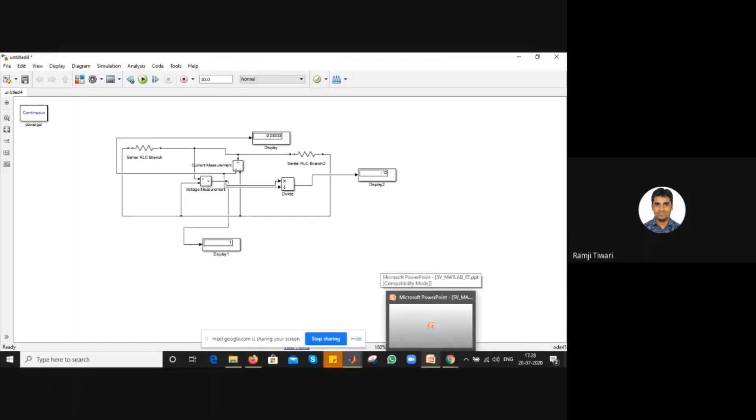I'll be sharing this so you can try by yourself. Take a small circuit and try it yourself. If you have any doubts, my mail ID is there in the PPT. You can text me. I'll mail you basic Thevenin's theorem, Norton's theorem, superposition theorem, nodal analysis, mesh analysis, KCL, KVL, and basic circuit diagrams. Try it yourself once so you'll get a clear idea. But just by seeing, you won't know anything. You must have hands-on training in that.

This is what I've done for bigger circuits using superposition theorem. I'll send you this circuit diagram, and you can try it manually. You can verify it with your simulation. If you see, simulation will be quite easy actually, rather than doing everything manually.

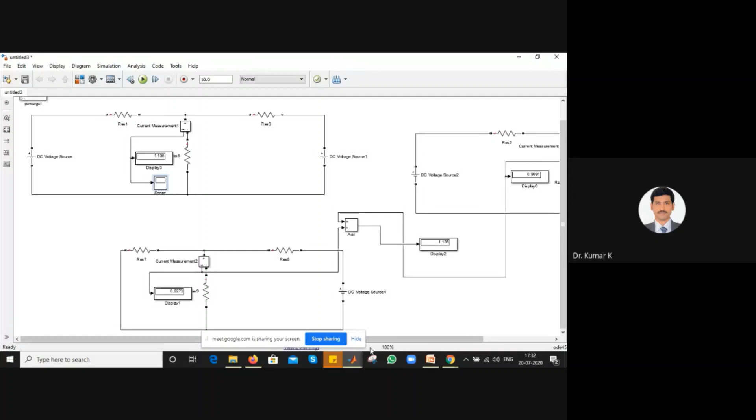So, excuse me sir, Ramji sir, here we have one question. What is the difference between display and scope? Just... no sir, yeah.

It's completed. Ramji sir, we will take one more question. Yes.

Hemant Sundar is asking, we need multiple displays to display multiple values instead of... is there any way to display multiple values in a single display?

No sir, we don't have that for this thing. Only for scope we have that one. Not possible, not possible, yes.

THD will be okay. This will be covered in further sessions, sir.

In PowerGUI, what is the difference between continuous and discrete, sir?

Discrete is used when, for example, you're designing a PV system using non-linear input variables. PV output is completely dependent upon irradiance and temperature, which is non-linear, or you can say discrete, in nature. In that case we need discrete settings to specify each and every pinpoint. But for normal circuit analysis, we use continuous, since we don't want to change much in the input variable.

For example, the DC voltage source I've given as 60 volts stays at 60 volts throughout the simulation running time, or if it's 100 volts, it stays 100 volts over the entire simulation time. I'm not going to change anything in my input variables during that time, so I'm using continuous for that.

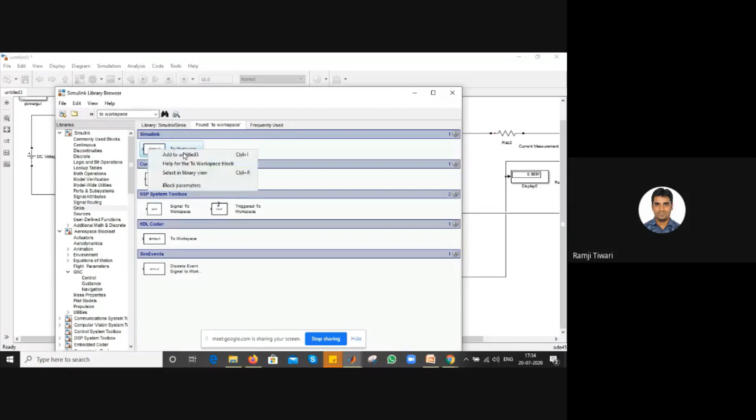The second method, which I'm going to tell you, is quite easy. You can use the To Workspace block. Whatever variable you want, you save it to the workspace. There are two ways to get your output into the workspace, one of which is using the To Workspace block, which I've added here.

Let's say I connect this To Workspace block to my output. I'll change the variable name to something like 'current'. Any value, I can just change it. Okay, now I'm going to run the simulation again.

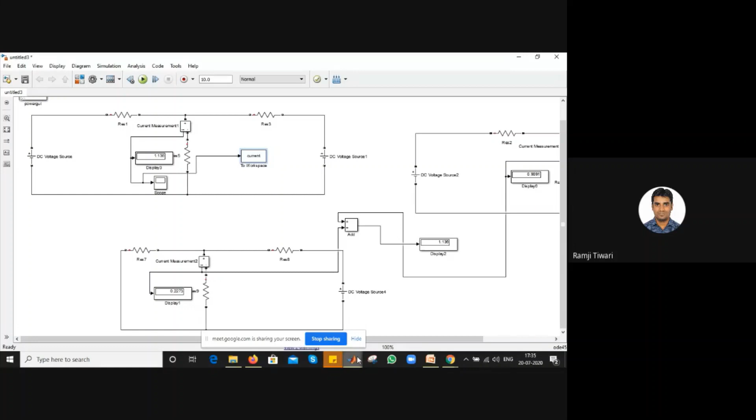Once the simulation is done, I go to the first page of my MATLAB workspace. Here, if I look, I'll find the variable named 'current'. You can see it here. Right click on it, and go for Plot.

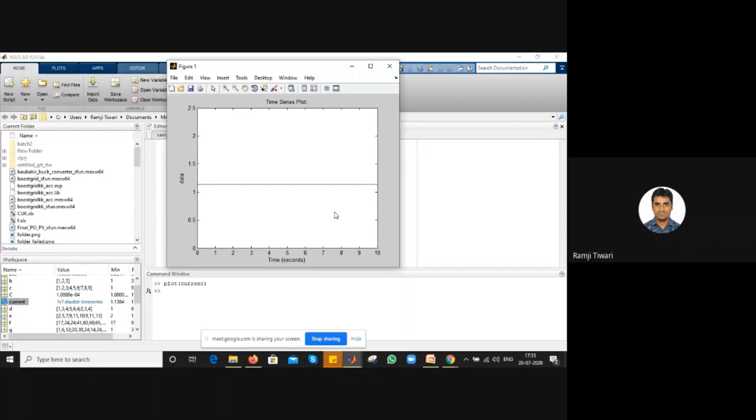Once you plot this, you get all the data here. Go to Edit, then Figure Properties. Here you can change settings. Double click this data, and you can change the label to 'current (amps)', or change it to 'time' or something else, whatever variable you're using.

Change it here, and it's going to update accordingly, like changing it to something else. I'm just going to use 'time' for one axis and 'frequency' for the other. You can change it here to get all the labels for your x-axis and y-axis.

One more advantage here is for when you want to use this for presentation purposes. If you take the plot directly from the scope, the line width will be very thin and you won't have much clarity. But here, you can go to the line properties, increase the width of the lines, set it to 4 to see the thicker width, and also change the color, for example to red.

You can also change the font. If you go to the font settings, you can change to whatever font you want and set the size you want.

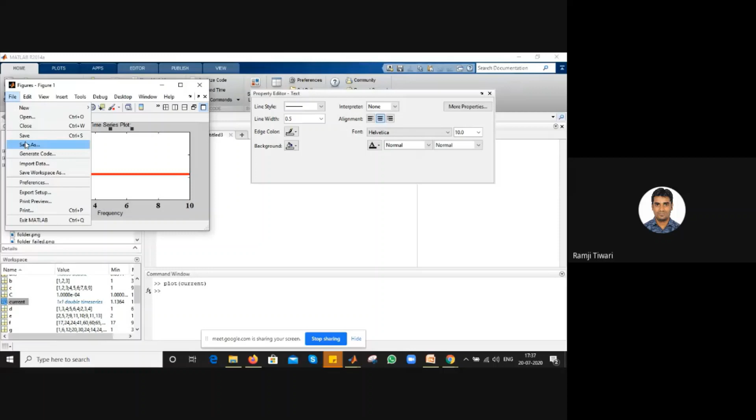I'm just going to save this with a file name called 'sample', in JPEG format, and save it. That will be saved on my desktop.

So that figure gets saved here, with your axis labels on the y-axis. By mistake, if the y-axis label gets deleted, you can just redo it slowly and get that name back.

Any more doubts? Yes, sir.

So why do we have to use only Demux? Actually, since we have multiple variables now, you need it. Mux is used when you have to combine many signals into one. Demux is a basic block for the opposite operation; there isn't really any other block for that purpose.

To go from one variable to many variables, you use Demux. A multimeter output will have multiple values bundled, based on your settings it could give 3, 4, 5, 6, whatever. That is a single combined variable, and once you want to separate that, you use Demux to get the individual signals.

If you don't use Demux, what happens? I'll show you. If you don't use Demux, everything in the output will appear on a single graph. A single graph is fine when you want to do a comparison. Let me show you an example. So if I don't use Demux, let's see what happens, I'll show you.

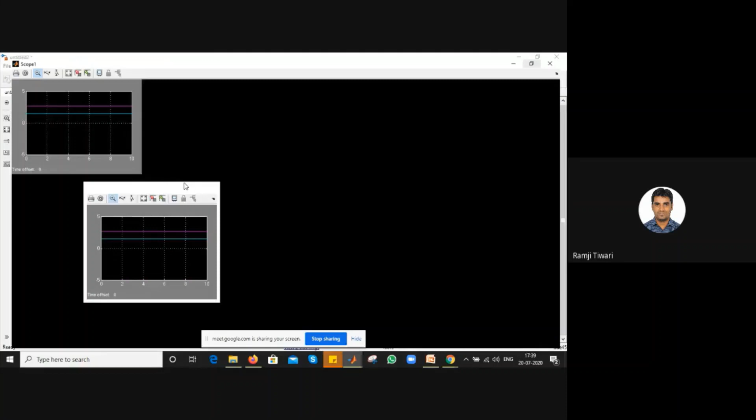You open this, you can see all 4 outputs are visible here. Your magenta color, your blue color, your yellow color, your red color. So all 4 outputs will be here.

To make this output a separate thing, you're going to use Demux. We have one Demux as a variable. I don't remember any other variables we have, any other tuples we have.

When you're using some comparison, you can use mux and compare 2 currents together, or voltage across 2 resistances. When you compare, you use mux for that. But once you're limiting multiple output variables to a single output variable, then you have to use demux.

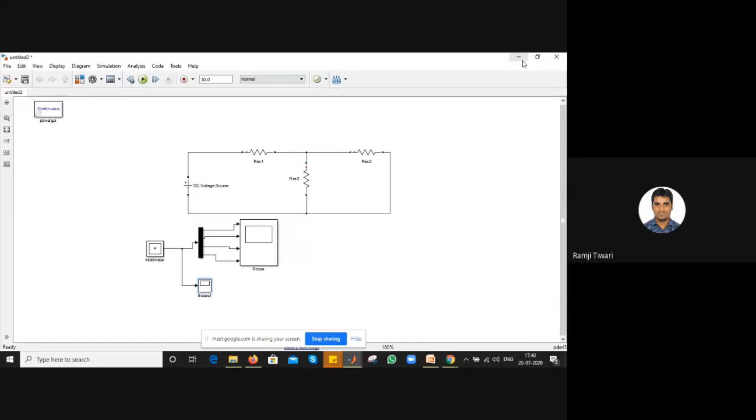That's the difference. One more question, sir - why is ground not necessary in the circuit? It's not required here, not required in circuits. You can use that, it won't give you any different answers. It's the same, just for a protected device.

When you are using some solver functions, at that time we'll be using ground - where your one loop will be open. Suppose you are using circuits where one loop is open, other loop is closed, at that time you will be using ground. But if everything is closed, ground is not required.

One more question, sir - can we get analog signal in scope, sir? Analog signals you can get, yes, your analog signals also. I guess in upcoming sections, tomorrow or day after tomorrow, we have some power systems sessions that will tell you how to get different signals in your scope.

Some students are asking if reference books are available, sir. Any reference? Yes, reference book is there. I'll be sending you the reference book. We have one reference book for your basic circuit, and another one for your next year power electronics thing. So I have two reference books which I'll be sharing with your organizers.